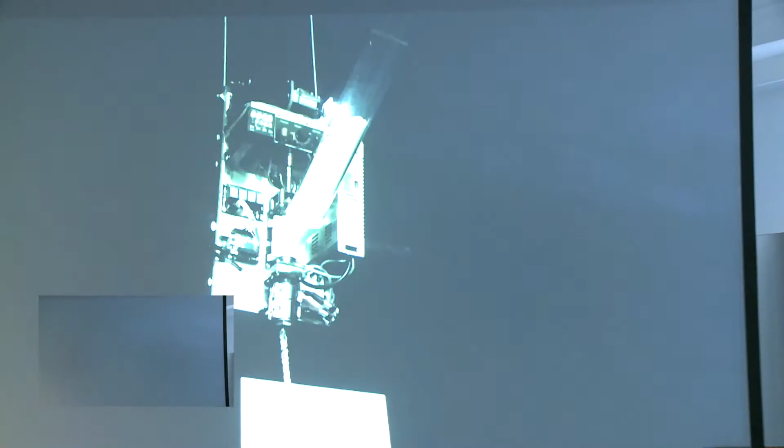Where's the sound? There's no sound playing. No, here, the cable is here. There is no sound. Why? Okay. So, there's a problem. It was working. Mattia. Yeah. But it's not reading. Okay. There you go. No, it's not. Just play it. No, don't play it. Look, it's not reading. Is it on the microphone? Yeah, it's done. It's because you need to play it. Can I? Just the audio. Yeah, just the audio. There's no audio. There's audio at our end, it's your end.

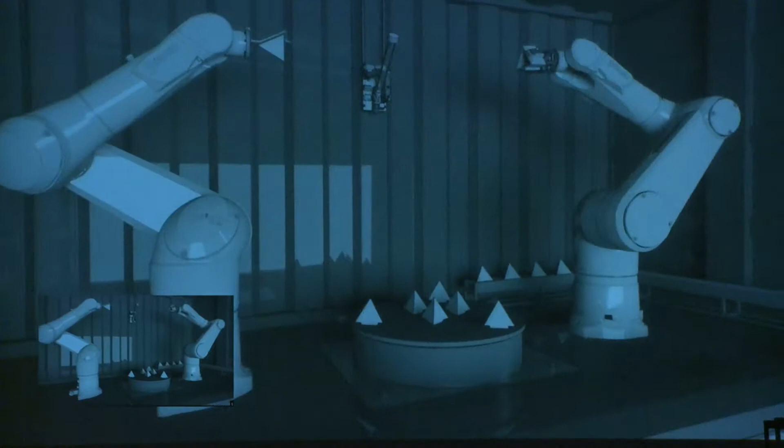Our thesis is on automated robotic fabrication for temporary architecture. At a minimum rate, there are 1,418 temporary pop-ups currently in London. All the waste from these temporary architectures, along with the permanent ones, contributes to 40% of the overall waste in London, making them the highest from the overall total waste. 70% of this waste ends up in landfill, while only 11% gets recycled. The London municipality is aiming to reduce the 70% to 20% and to increase recyclability from 11% to 25%.

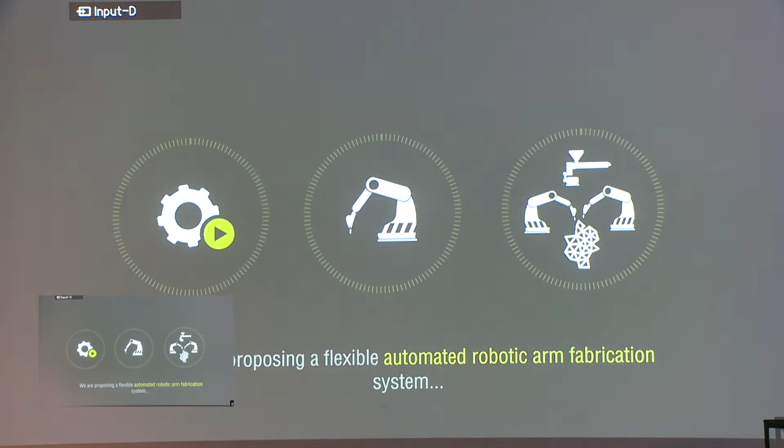Therefore, we're proposing a flexible automated robotic arm fabrication system, which exploits phase-changing material and utilizes robotic arms' intelligence by executing accurate, repetitive actions. The system, enclosed in a mobile cell, allows the fabrication of a continuous lattice structure that can be melted and reused again or just be left to biodegrade. The dynamism and reusability of our system result in various temporary architecture applications, where the manufactured lattice is manually assembled on site using heat only.

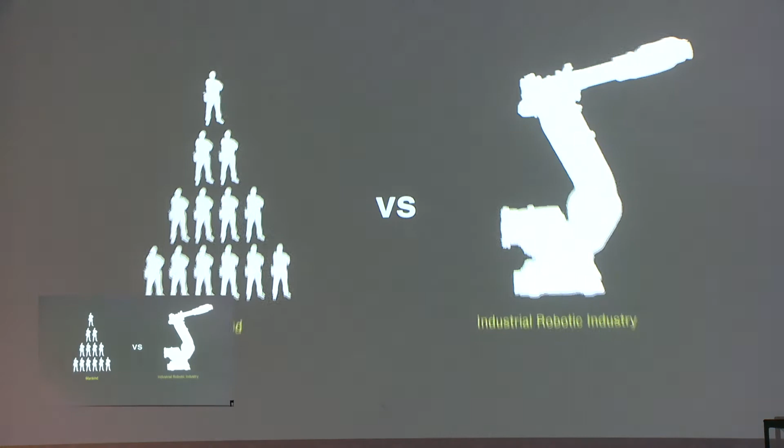Over the centuries, industrial robotic arms have been trying to replace human force in factories by only doing things faster, stronger, and more accurate, but never replace intelligence. Since the use of industrial robotic arms in the factory, until this day, they've only been doing things more accurately, faster and better, but not yet integrating the intelligence of the material at hand. Thus, architects look at robotic arms and understand their different parameters to use them differently.

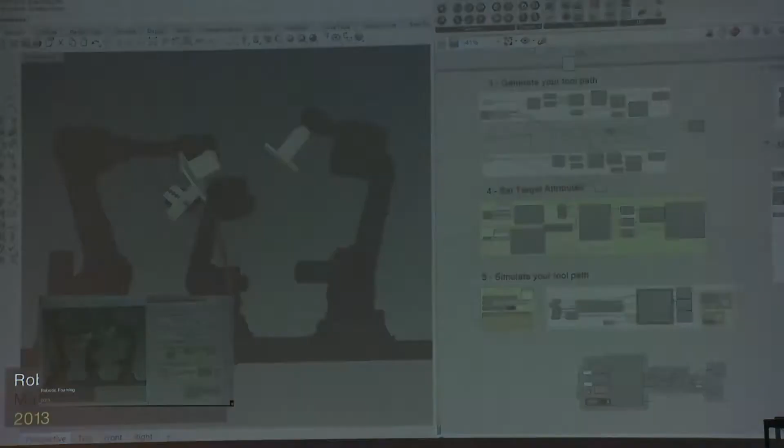Architects such as Gramazio and Kohler try to understand the parameters of this tool, and rather than use it as a fabrication tool, try to integrate it in a bigger picture where the material is thought of as intelligent. Thus, we're aiming to shift this paradigm of the industrial robot being just a force replacement in factories and try to integrate it in a bigger picture with the material. So why are we using robotic arms? For their accuracy, simple repetitive actions and customization of their end effector, to integrate them with the material intelligence and to facilitate a novel kind of architecture.

As a phase-changing material, we focused on plastics. Plastic has had its use in architecture since the 1950s, when architects were trying to produce a continuous free-form shape. Yet, they were only able to achieve it in panels. Even until this day, panelization of plastic came a long way, where they tried to triangulate to produce free-form shapes or cast all the plastic at once. But none of these projects really look at the phase-changing materiality of plastics and what can be done with it, such as this project where the material is actually pulled. So we're aiming to use phase-changing plastic with its material intelligence to create a continuous structure.

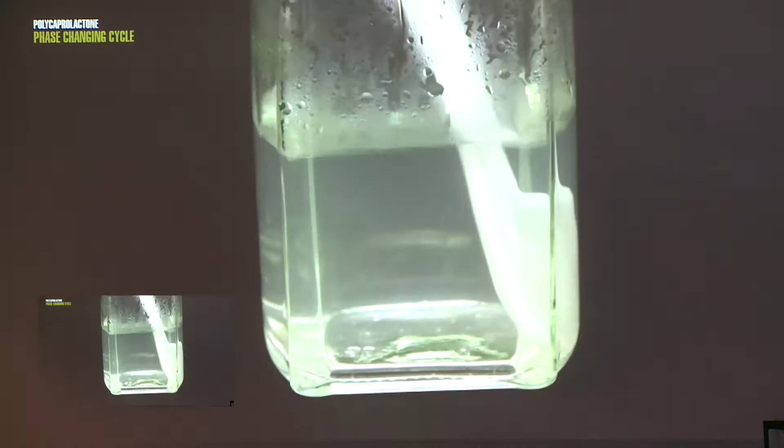We are using polycaprolactone. Polycaprolactone is a biodegradable polyester whose melting point is 60 degrees. The most important characteristics of this material are that it's biodegradable, reusable, has high abrasion resistance, and high elasticity. How does this material change phase? Initially, it comes in white granules that become a viscous mass by heating at 60 degrees. This material can be cooled down to get the solidified state, and can be melted again to reuse the material just by heating at 60 degrees. So the loop can repeat over and over again.

So having that in mind, we start to program our polycaprolactone. So the first experiments that we did, we used the solid granules, heating it by 60 degrees, getting the hot viscous mass. This viscous mass was deposited in 2 acrylic rigid plates, that then when pushed inwards and then pulled outwards, reaching a position or reaching a length, cooling it down to get a pulled beam.

So the first experiment, we did small-scale experiments trying to fuse the material with other materials and trying to look at the parameters of temperature and quantity, and then trying to scale up the most successful experiments and looking again at the parameters of temperature versus quantity. The physical experiment showed us that many parameters are involved in the material formation. For this reason, we developed a material simulation that allows us to study these parameters individually.

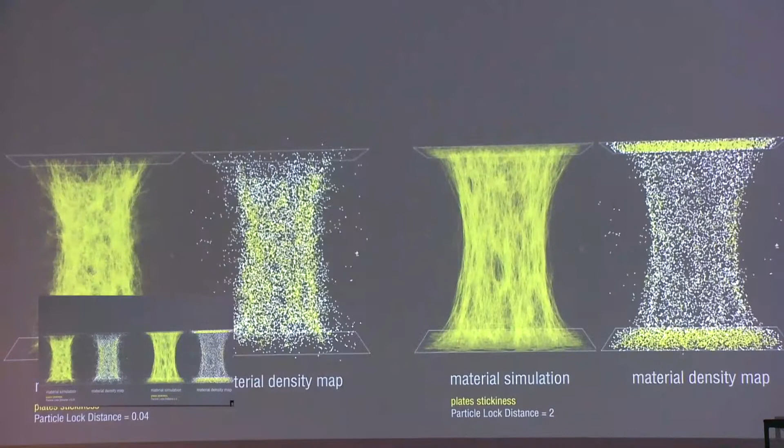First parameter that we studied is the particle thickness. So the number of neighbors that are connecting each other are able to control and determine the section. Another important parameter is the plates stickiness. According to how much material sticks on the plate, we can have a big section or a small section. So we understood by this that the plates can change the structural behavior of our beams.

Another important parameter is the initial material distribution that controls the amount of holes that we generate in the beams. We can see on the right side the formation of holes, while the left side is uniform and doesn't have holes. Last parameter that we studied is the viscosity of the material. More dense parts have more weight and they collapse on themselves. This doesn't allow the section to form properly.

After looking at all of those material simulation parameters, we were evaluating which is the correct deposition and the correct shape of the plate that we need to use. So we came to the conclusion that the triangular deposition and triangular plate is the optimal, because the surface tension is divided equally in 3 parts to get a stronger section.

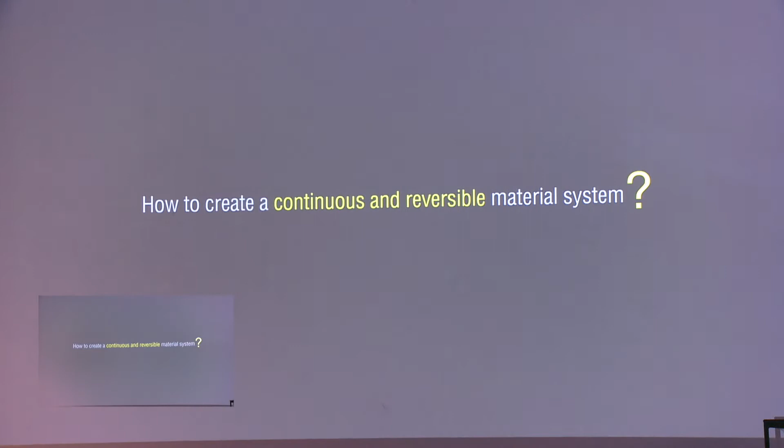So we started those experiments with triangular plates, acrylic plates, still trying to deposit in lines and in solid mass, getting a better result with solid mass. And also trying to get material continuity, we tried to explode or kind of pull a tetrahedron node, which we couldn't control really well. And also we had the issue of the rigid acrylic plates, so we couldn't get the continuity so well. So how to create a continuous and reversible material system? We came up with prefabricated nodes.

So the first prefabricated node is a tetrahedron node that is made of polycaprolactone, is lightweight, it's a regular tetrahedron, and a polycaprolactone regular triangular plate, which has 5 millimeters thickness. And we are pulling beams from those nodes. The minimum extrusion length is 10 centimeters, and the maximum extrusion length is 60 centimeters.

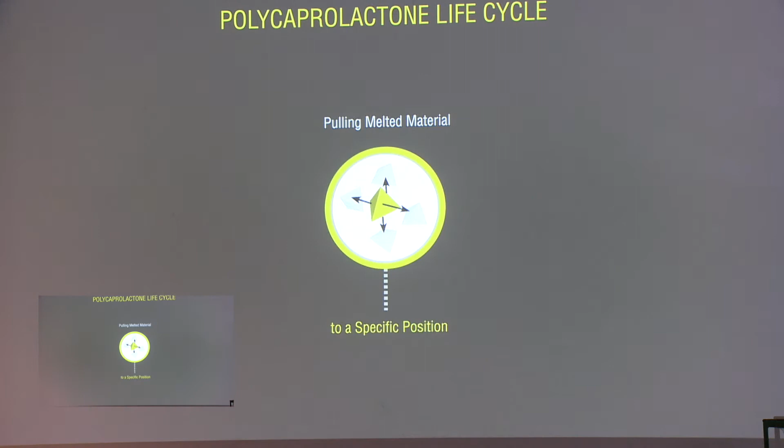So summarizing, how is our technique? We are taking the solid granules, heating them at 60 degrees, melting them until getting the viscous mass, depositing the material on rigid plates or tetrahedrons, pushing the melted material inwards, the nodes, pulling the melted material to reach a position, cooling the material down to reach the beam, and the loop can be repeated to create the lattice. So it gives us a cycle which leads to reusability.

To demonstrate that the system can behave well, we did 2 kinds of pulling: from plates to the tetrahedron node, and from tetrahedron to other tetrahedrons. Also, when all of the tetrahedrons are static, not doing anything.

Don't touch this. So when all of the, I didn't do anything.

Are static, we are closing the loop with the rigid plates. That's the use of the rigid plate.

So we are, move this a bit. It's okay. Just don't touch it.

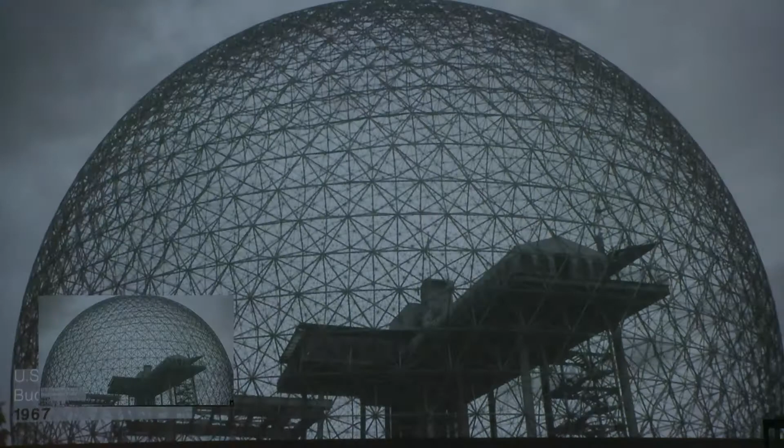We also looked at lattice relaxation, and the reason we did that is because we want a continuous lattice structure that can behave structurally, not dependent on the element itself, but rather as the whole network.

So in order to create a lattice structure, we were evaluating with the small scale models different kind of branching inside the system and evaluating which are the constraints of our material physically to get the lattice structure.

So those constraints are angle tolerances, extrusion length, tetrahedron position, and taking in consideration as well the robotic arm's constraints. So evaluating this, we know that the pulling of each beam has angle tolerances. So in each axis, X, Y, and Z, we have 45 degrees of tolerance to pull the beam.

Also, we consider which are the best orientations in space of the tetrahedron. So the first position is the best position for anchor point to the ground. The second position gives us opportunity for growing for upper structures. The third position gives us the possibility to join sides and connect ground with upper structures. And the fourth is a double tetrahedra that can give us more available faces to connect up and down.

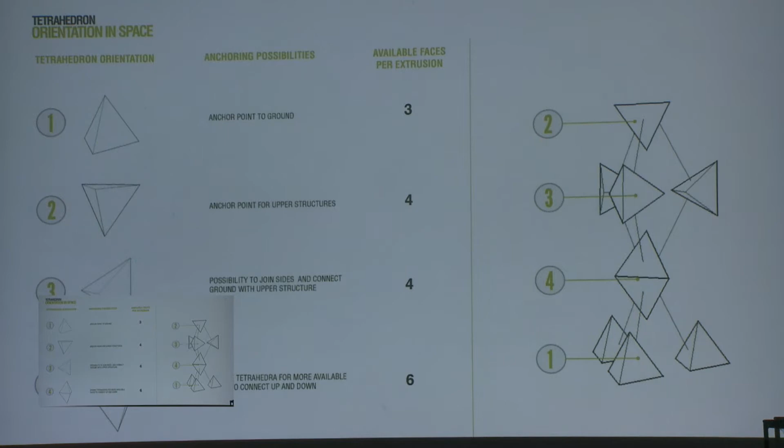So after this evaluation, we start with our spatial primitives. So starting with the minimum column, we develop a core that should be tied twice in order to get a triangulated column. In this case, the length of each beam varies depending on the force that they need to support. We develop a catalog of our spatial primitives. The minimal diameter is 0.90 meters, and the maximum is 1.20 meters.

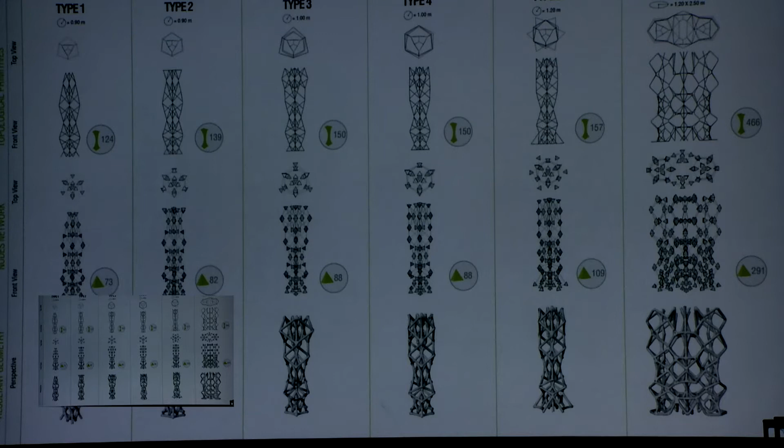We studied how with our system it is possible to generate a wall. The initial distribution of the anchor points controls the way the wall can grow. And the second layer determines the kind of pattern that we can achieve. We studied three different types of wall. First, we tried to have a minimal wall of 30 centimeters. Second is a wall of 50 centimeters. And third is a wall with 90 centimeters of thickness. We studied, moreover, how we can connect these walls together.

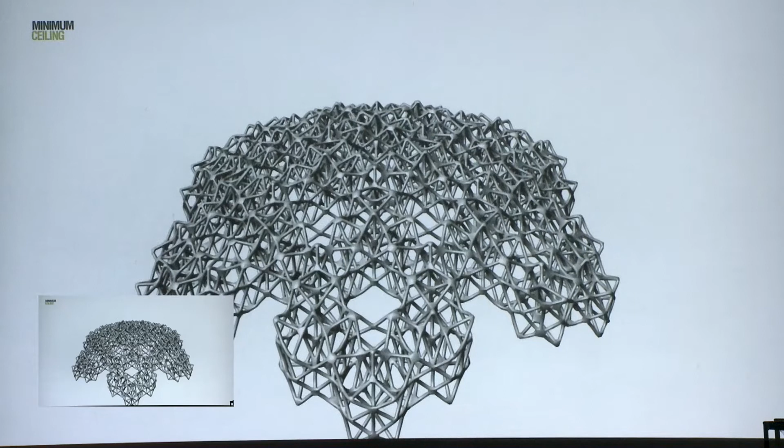As well, we studied ceilings and domes and shells. First, we started to generate a flat ceiling, but we realized that our structure doesn't really work flat. So we used a mesh, we relaxed it, so the triangulation of those elements is in between the range of our beams, and then we developed units on top of that relaxed mesh. We developed 2 units. Those units are only triangulated by themselves. They cannot allow available faces for the next one.

But then we moved forward and we developed another kind of units that have available faces to grow the structure. The first one allows the structure to grow linearly without any holes in the generated structure, while the second one allows the structure to grow radially, generating holes in between the structure. This is the catalog that we produced of the different single, double curvature, and shell primitives. And as you can see, different units generate different kinds of structures.

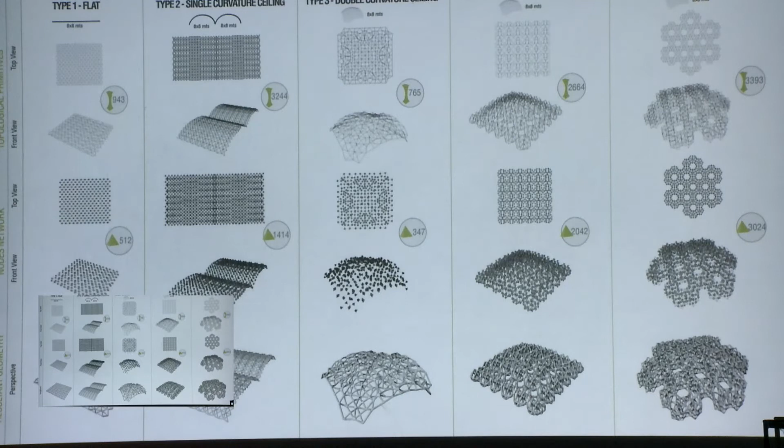Then we were evaluating the connection between columns and ceilings or walls and ceilings. So for this, it's really important to look how many available faces for connections are in the ceiling and in the column. For that reason, we develop a generic funnel that can be attached to both structures and can be adaptable for different kinds of ceilings and different kinds of columns. So this is a kind of catalog in which it's perceivable that it can be adaptable to different kinds of configurations.

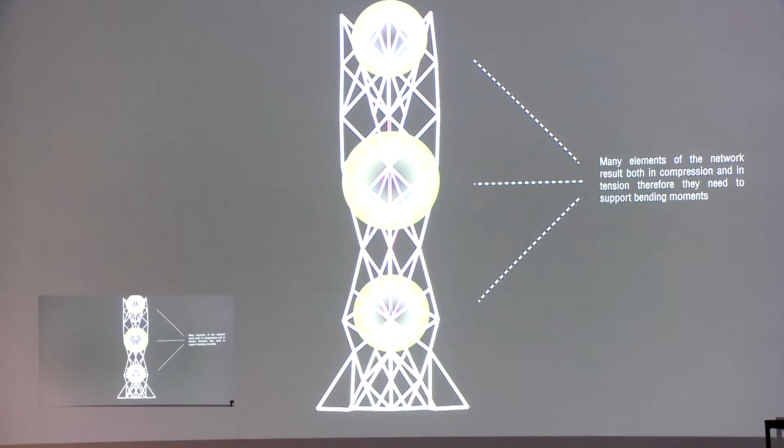These spatial primitives are evaluated from a structural point of view for the requirements given by our material. Thanks to the structural analysis, we understood that some of the elements in our lattice are both in tension and in compression. But what we observe is that the material that we have actually generates beams that are thin in the center, so they are unstable and they work better in pure axial forces, tension or compression.

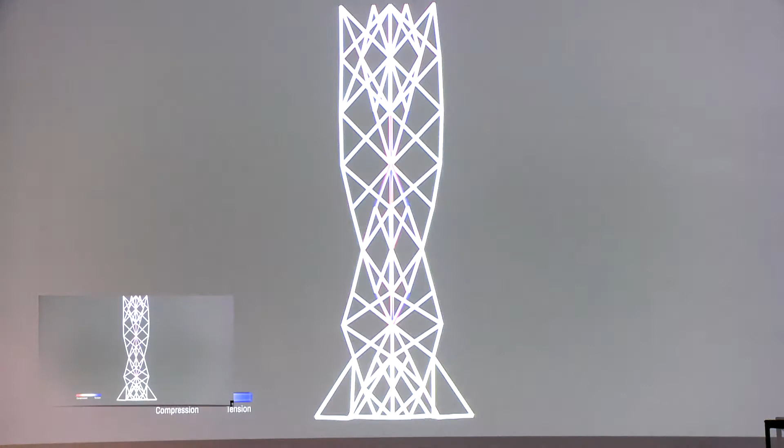So we studied how we can achieve a pure axial network using a particle spring system. But we need to consider also the parameters of our material, the constraints of our material: angles, extrusion length, tetrahedron position, and robotic fabrication. In order to do this, we developed a strategy where we are controlling the relaxation of the system, allowing only those points that have more tension to move. So we are trying to reduce the singularities in the flow of the tension.

We are studying also how, when we are going to fabricate the system, the equilibrium of each element works. So we separated it in chunks of fabrication, and we are considering anchor points and load points, and we are analyzing the displacement of these elements in order to understand where the anchor point will be when we are going to overlap many layers of construction.

So we get from here two important pieces of information: the distribution of the beams that are going to have more deformation, and the distribution of anchor points by overlapping different layers. We compared the different networks and the behavior of different networks. In the case of the column, the strategy was to try to find a network that needs less deformation to reduce the

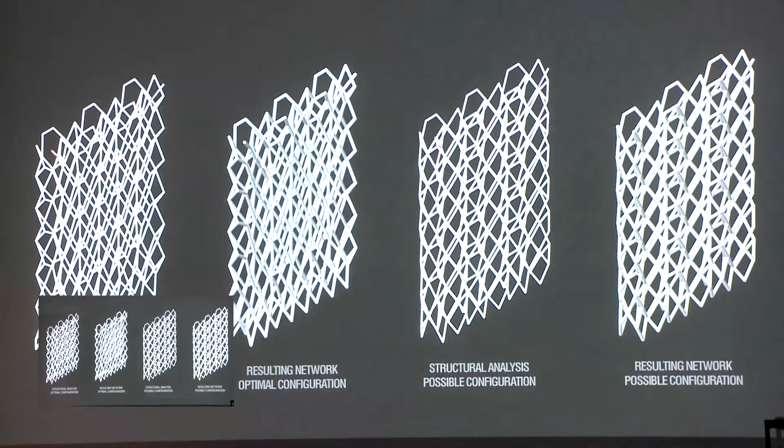bending forces. We did the same studies also for the walls, and we observed that in the walls the tension configuration is closer to the starting configuration. Similar studies have been done for the ceilings, and what we observed here is that the ceilings tend to generate in the bottom part concave shapes in order to support the loads. Similar behaviors to the column have been observed also in the funnel.

In parallel with the material experiments and the primitives, we started to study the robotic movements, constraints, possibilities, and limitations that we have. We started to see how robotic arms are used in the industry. They are using them according to the usage of the end effector. The end effector, its customization and possibilities, gives the robotic arm the opportunity to do different actions. So for us, the end effector is a mediator between the material intelligence and the robotic action.

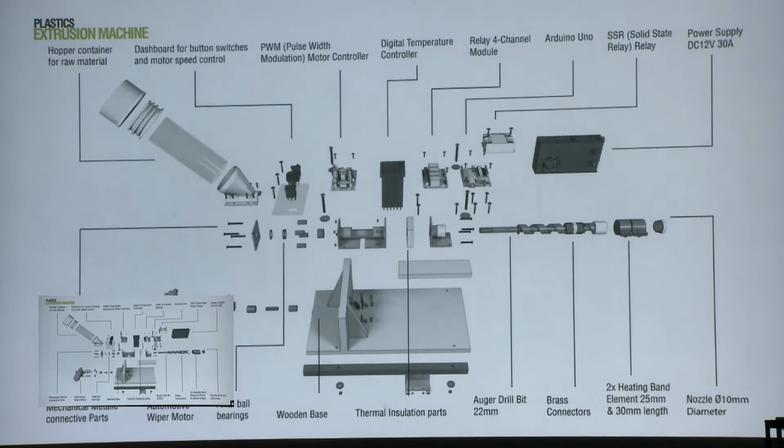As long as we have a depositing system, a deposition machine, it needs to be developed. This is an extrusion machine that takes the material as granules and extrudes it at 60 degrees as a viscous mass. It's run by a temperature controller, and we use an Arduino and a DC motor to control the deposition and the speed of the deposition in order to have an automated fabrication system.

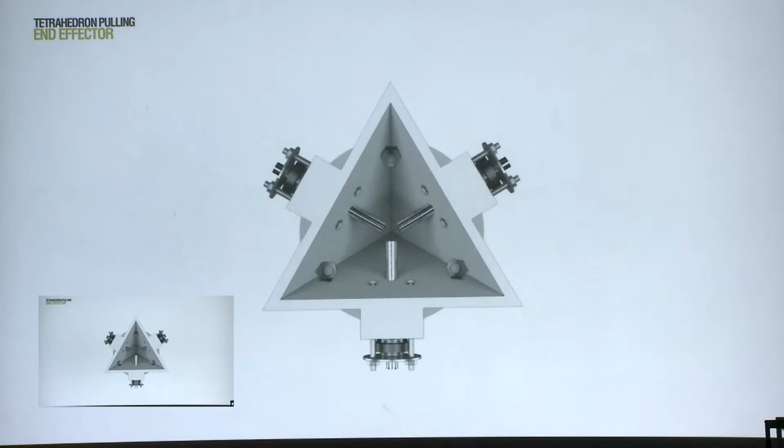The next end effector that was necessary was an end effector that can take the tetrahedron, place it and release it in place. So it's an effector that can lock and unlock the tetrahedra and place it in position. Another necessary effector is the plate end effector, the one that needs to connect two faces in between. It's a simple mechanical end effector that can change the plate easily and in a fast way.

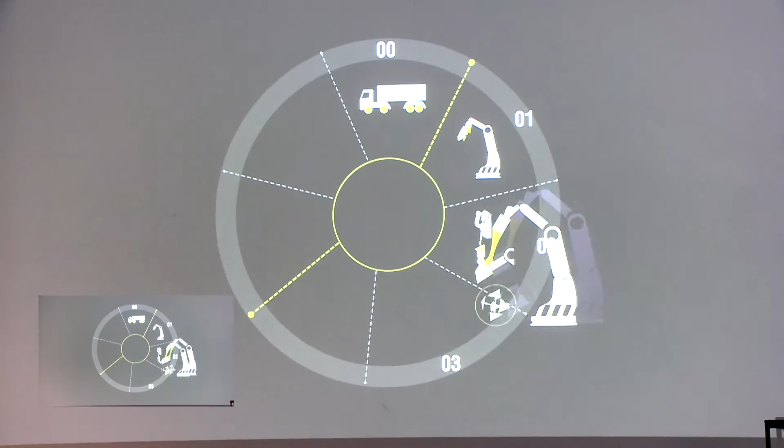So, how does our fabrication process work? The whole process is enclosed in a cell. The cell is mobile, with the minimum amount of robots needed for the fabrication to start. The fabrication starts by picking a node, then the robot takes the node to the extruder, goes to the anchor point, pulls the beam and then freezes the beam with cold air. Once the units are fabricated, they are assembled on site by human workers using heat only.

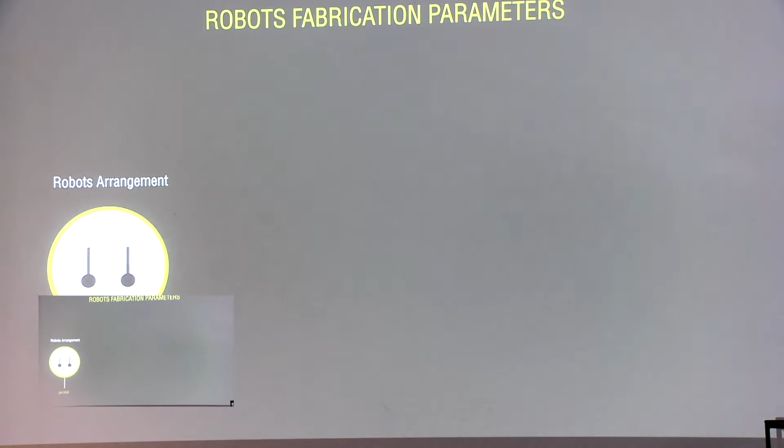Once that architecture is done, it can either be shredded down and refed into the system or just left to biodegrade and produce biomass. To demonstrate this cycle, we did a prototype with an already arranged configuration of robots that we had to study and fit into our system. These are the main parameters that played a big role in the fabrication process, as well as real-time parameters such as extrusion speed and deposition speed.

A geometry was fabricated specifically for this arrangement of robots. As I said before, the arrangement affects the geometry and so on. A rotation table was needed, so the pulling point is only in one point for both robots, and the extruder is placed in between the two robots to facilitate a faster process.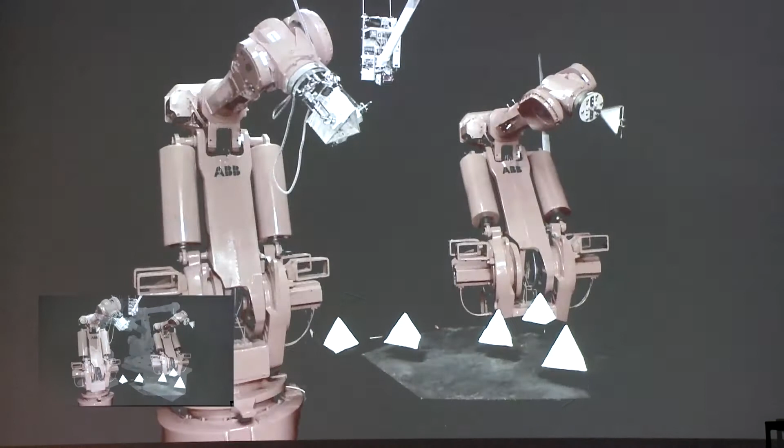So the process starts with a predefined position where the choreography can take place to all the points in space desired for the pulling. The tetrahedron position is also predefined. We have two end effectors: the pulling end effector, which also picks up the tetrahedron, and the plate end effector, which only connects an existing beam pulled in space. The extruder is static in between the two robots, and the process starts by picking up the tetrahedron.

Then the robot goes to the extruder to extrude the material on the face of the picked tetrahedron. The control of the temperature of the extruded material is really important because it affects the structure of the beam that is being pulled by the robot.

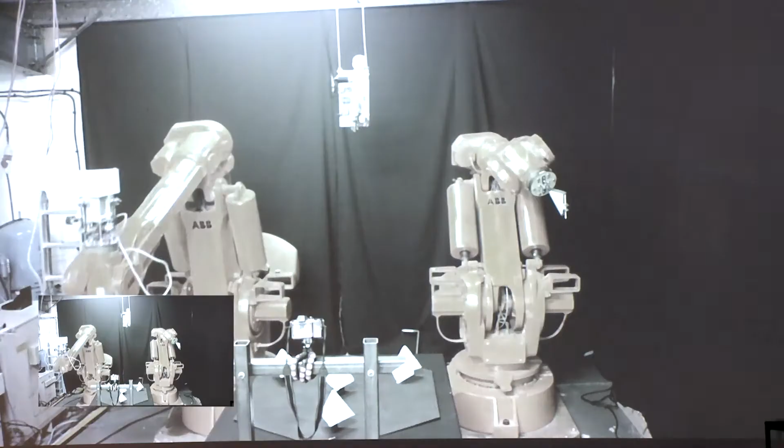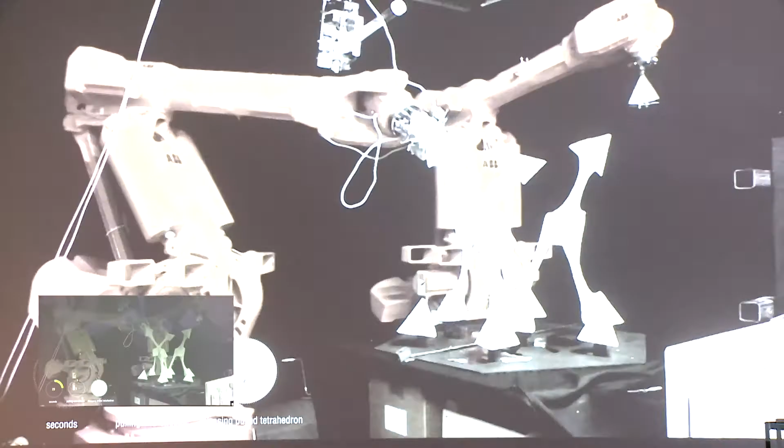Once the extrusion process is done, the robot goes to the predefined anchor point and starts pulling the iterations. The speed and the angle at which the robot pulls the material are really important, and this is where the accuracy of robotic arms comes in handy. Freezing is manual at this point, but we integrate it automatically later in the system. The plate end effector is used to connect two existing nodes in space.

And then we freeze the material instantly. Within seconds, it sets solid. Now, to join the two existing solid plates, we just use heat on one surface of the existing pulled beam to join the two nodes manually.

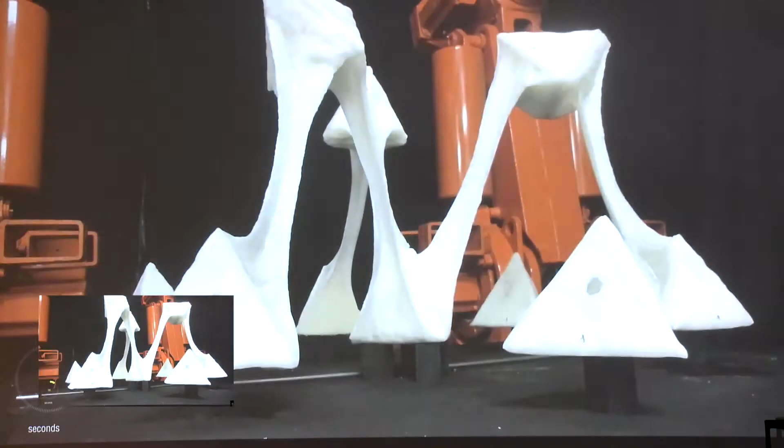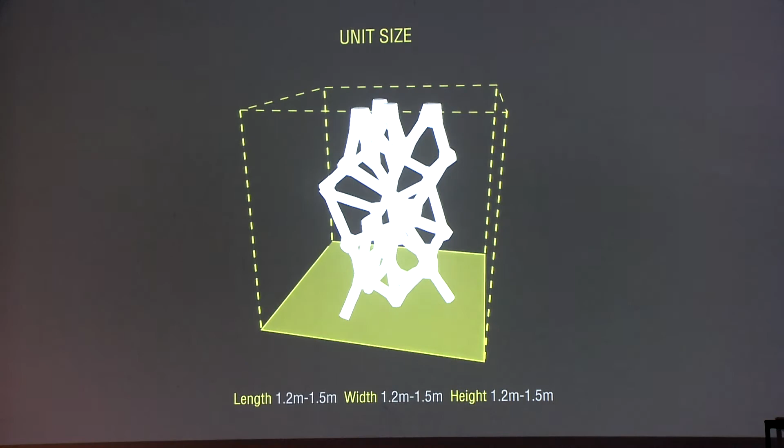We continue studying the robotic configuration, which is the optimal configuration of the robot regarding the parameters. And we have units. The unit size is very important. Our unit size is usually 1.2 to 1.5 meters. So we consider this as a working space. As long as we are using symmetry as well, it's important for us.

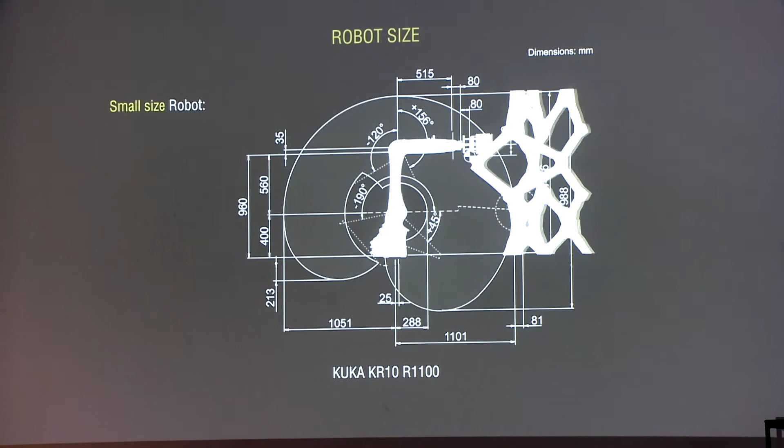We are using a rotation table, so the robot doesn't have to move in space, rather the model is moving around, so it can reach a certain position more easily and achieve the movement needed. With the robot size, it's important to define the distance between the working area and the robot, and we started to figure out, with the different models and sizes of the robot, which one is needed for our fabrication. The small-size model seems to be the best one in order to achieve our movement.

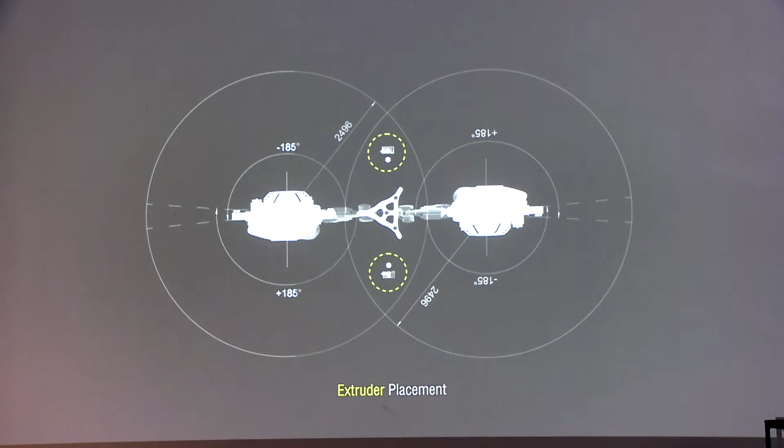And as long as we have the two robots, the extruder placement needs to be equally divided in space, so the robot can reach it. We divide the space equally for the two robots as well. Saying that, the cell that we are trying to achieve seems to be 6 by 4 by 3 meters, and it's the optimal configuration that we need to do our units and to fabricate.

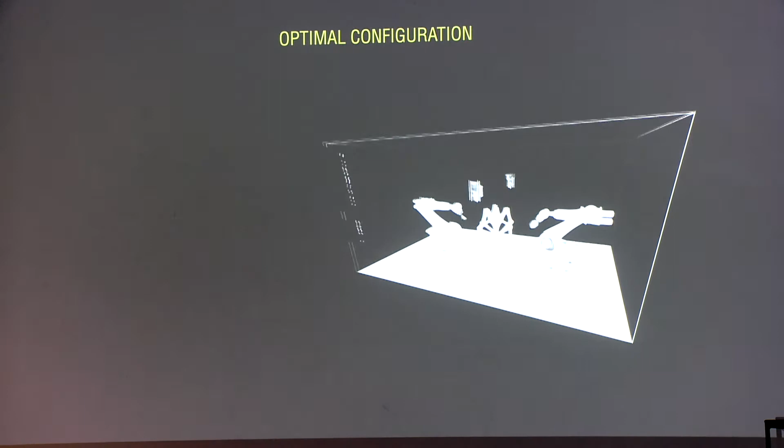So, we're aiming to shift this paradigm where industrial robots are used in factories to produce building blocks, and those building blocks are moved to site, and then on site they're assembled by humans. Rather, we want to fade away this line in between and bring it all into one, where the material, the process of fabrication and the outcome are all in one. And a precedent is Gramazio Kohler, where the robot is actually building the architecture on site, and it's the factory as well.

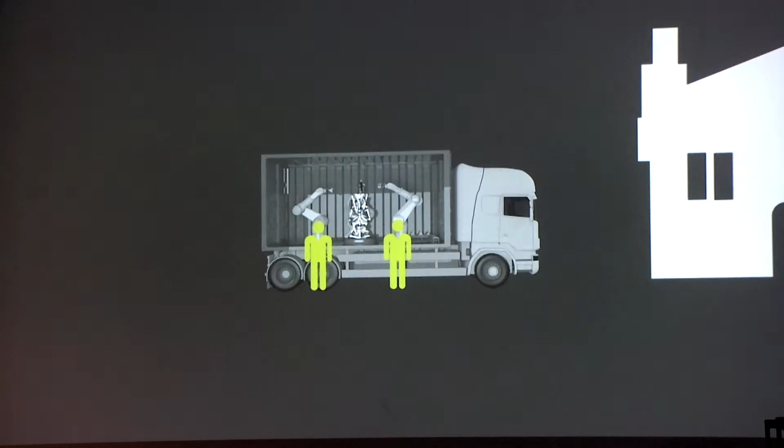Therefore, knowing our optimal configuration that can fit into a standard truck and can be moved to site, once the truck arrives on site, the fabrication starts. And once the fabrication of the unit ends, manual workers assemble those units on site using heat only. The fabrication process is aimed to be as simple as possible.

So in summary, our system can produce structures that are jointless and self-bindable with minimum scaffolding and no formwork needed. All the manufacturing process is done in a mobile cell, and once the units are no longer in use, they can either be shredded down, refit into the system, or left to biodegrade. The biodegradability of the material can vary according to usage, from 45 days to 4 years. Approximately, it takes 2 hours to produce 1 cubic meter of space with our material.

So what can we do with this automated robotic fabrication system? Due to the material's phase-changing property, it can produce different kinds of nodes, different angles and different directions. Along with the precision of the robot and the intelligence of the material, we're producing lattice structures that can be assembled on site using heat only, for different kinds of activities: restaurants, galleries, spaces, pavilions, and so on. So as a prototypical approach, we chose a restaurant and a performance space to demonstrate our system.

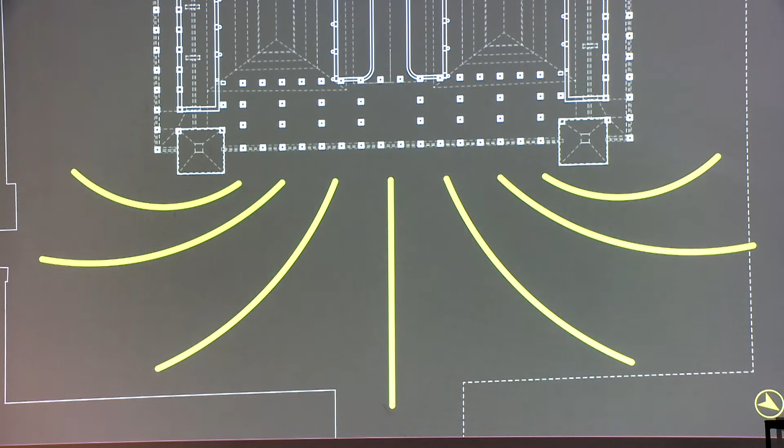We generated a prototypical application of our system on the restaurant in the Covent Garden Market in front of Russell Street. In order to generate a relation with the Opera House building, we extended the design area from the terrace to the square. We took into consideration the main circulation that happens in the square, and we focused our attention on the circulation that affects our design area.

According to this circulation, we defined anchor points that we use to define the boundary and the opening edge of our geometry. We introduce closed boundaries that generate new anchor points, and we generated a circular pattern that gives us control over the length and the distribution of density of nodes, generating the 2D initial pattern.

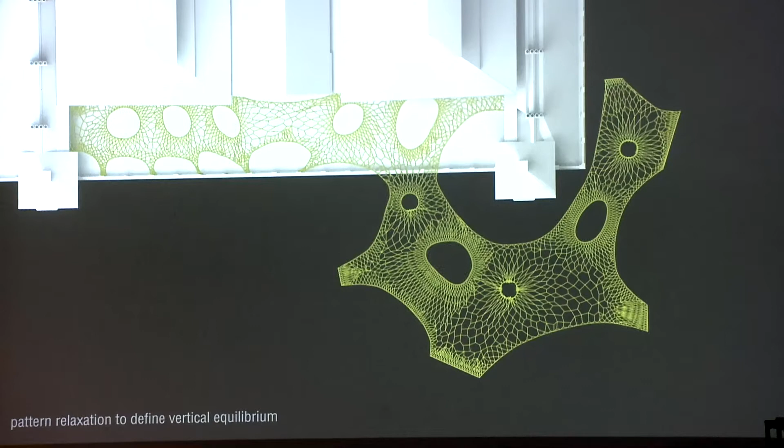Then we relaxed this structure in order to respect the material behavior, which needs to work mainly in axial forces. As we can see, we are achieving a network that is mainly working in compression and in tension. Tension happens mainly in the closed boundaries. We are controlling the parameters of this relaxation, taking into consideration the maximum length that the material can achieve. So we relax the system in order to keep the maximum length at 60 centimeters.

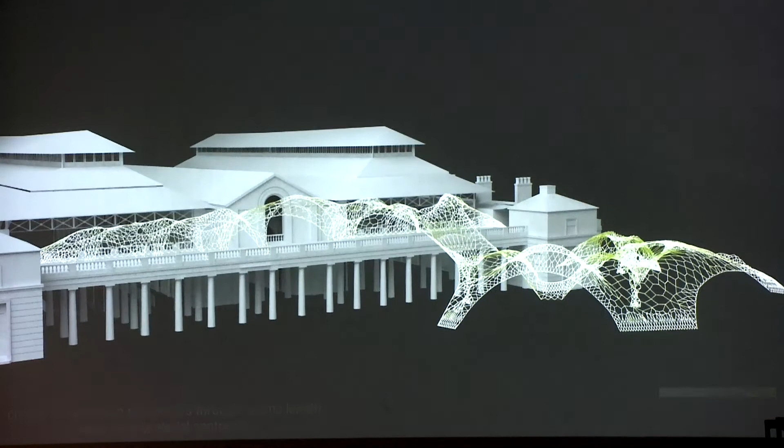At the end of this process, we are evaluating and controlling the angle distribution. That is another important material parameter for our system. And we can observe from the map and from the diagrams that the distribution is changing according to a 5% value. So it is perfectly feasible with our material parameters.

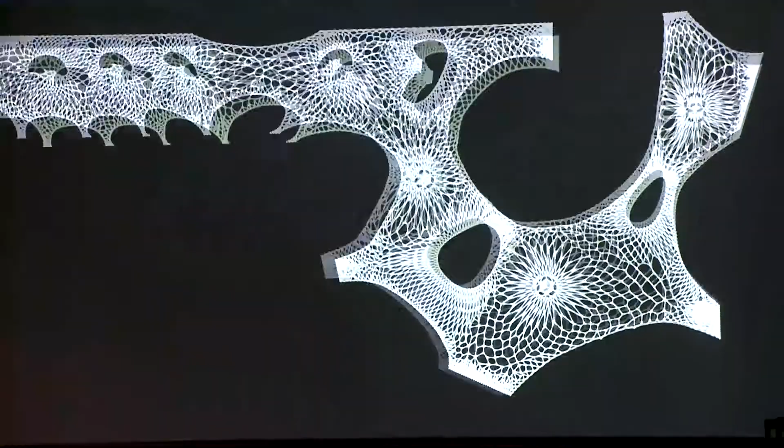In order to fabricate our system, we subdivide the geometry into fabrication units that will be assembled by hand. The assembly process starts from the anchor points and grows radially in order to complete the wall structure using temporary scaffolding points. So in summary, the mobile cell moves to different kinds of sites. And in our case, it's moving towards Covent Garden. Once the cell arrives, the fabrication process starts.

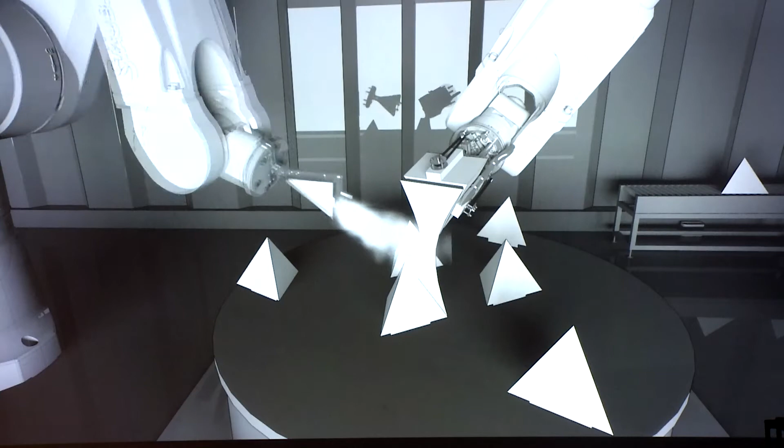Then the fabricated units are assembled manually on site. The units are assembled as on the pattern. And then the structure is achieved. It's used heat only, so it's a monomaterial, completely integrated.

And this is a prototypical scenario of the application. Once it's done, it either biodegrades and produces biomass, or it's refed into the system and moves to another site.

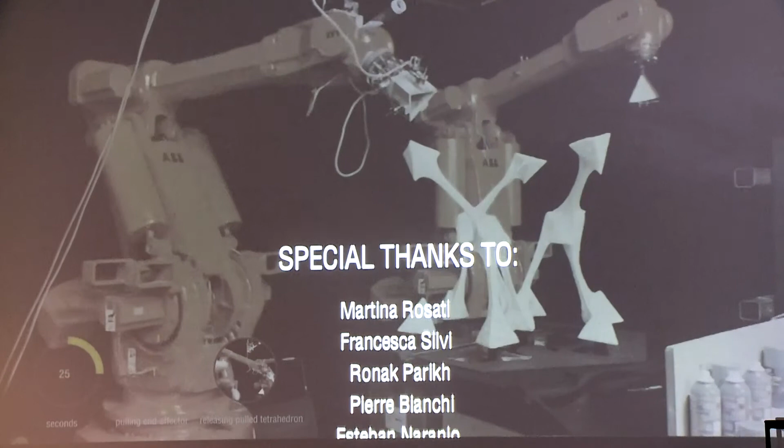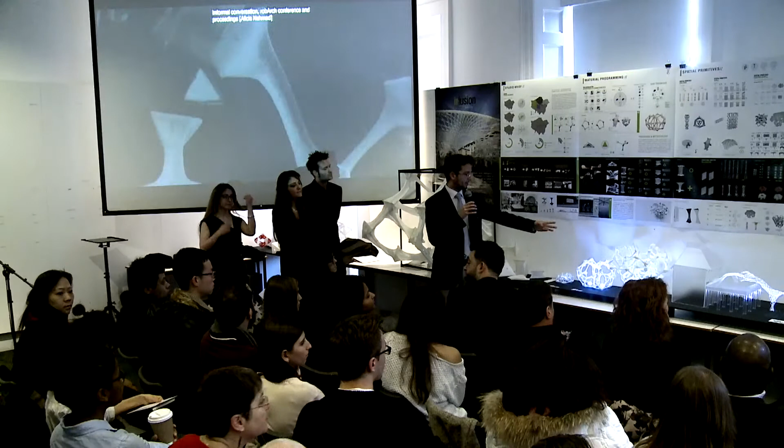This is one of our initial experiments while we were using the rigid plates, and we still didn't achieve the continuity of the material. Then these are some spatial primitives and explorations that we did to achieve the angles. Then the material experimentation helped to continue with the digital.

This is a design proposal that we see as a prototypical example of our system. These are some of the spatial primitives, and these are our end effectors that we were using for the fabrication.

Here we demonstrate what is the minimum and the maximum length of the beams with our material, and this is the fabrication that we did in RoboFold with Greg, that we have here. It's a 1:1 scale model, and it uses robots completely to fabricate.

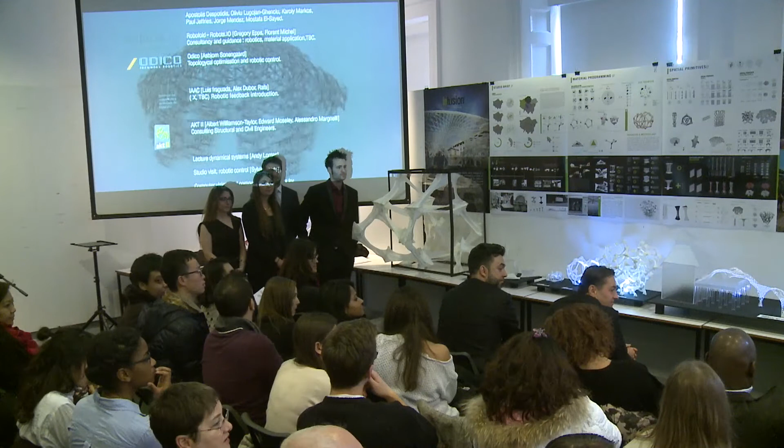Very fascinating, and a lot of work put into this, and also great that you achieved to realize something, a real prototype. I'll maybe directly dive into some questions that hint at the structural constraints that you might have. You made a comment that you optimize it to reduce the tension in the elements, but the shape of the profile is actually best in tension, not in compression.

And that is a very non-typical thing. So imagine optimizing a column where you try to have as many tension elements as possible, because your profile suggests that. So that might be interesting to explore.

Also, when you look at the prototype that you did at RoboFold, you see that gravity plays a big role during your extrusion. So perhaps it's more relevant to optimize your discretization, or how you cut up the pieces that you will assemble on site, having them as much aligned with gravity in the workshop, so that you can control your geometry, right?

Or otherwise, you were talking about material intelligence. Well, that is perhaps a part of the material that is kind of dumb for what you're trying to do with it. So then you would need to take that into your simulation as well.

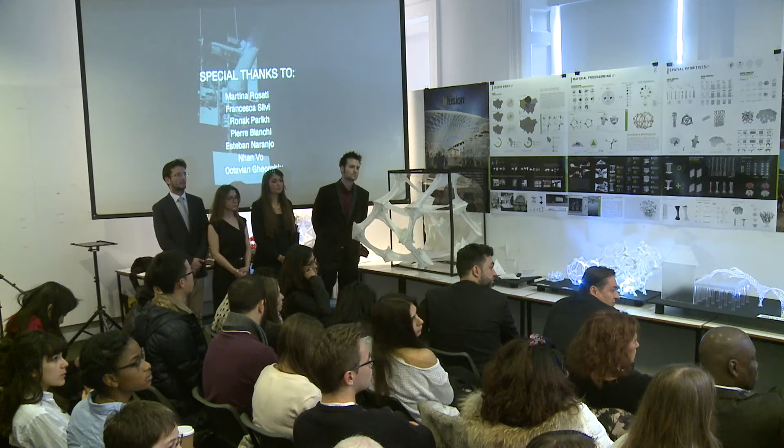I think it's pretty amazing that you have these prototypes here. First of all, it's pretty incredible to see. There's a sort of narrative in the project that's related to in situ fabrication. You spend a lot of time talking about this kind of cell that shows up on a site with these two robots in it. And for me, that's less compelling right now.

It almost seems like it's not really necessary, per se. I mean, this could easily just be built in a studio and brought to a site. And as you've mentioned, there might be efficiencies to that.

And I can't help but wonder, maybe it's because I've been staring at this clicking machine, which seems like there's been some real innovation here in the end effector. I can't help but wonder if there was another project here that would question the industrial robot arm much more fundamentally.

At least for me right now, I know that these are doing complex things, but really when I get into it, I can actually replicate much of this motion just with my arms, and maybe some very simple motors that are angling, and it just seems like the innovation here could also begin to take on a kind of machine design, a kind of creative machine that could in fact be in situ, that might create a component and then slide along that component, create the next component, and would begin to quite literally fabricate this in situ.

And again, I'm fantasizing about a kind of machine that doesn't exist in the world. But I wonder if really to produce the kind of project with the narrative that you're after, it really is going to take much more machine innovation at a more fundamental level to really question the technology much more fundamentally.

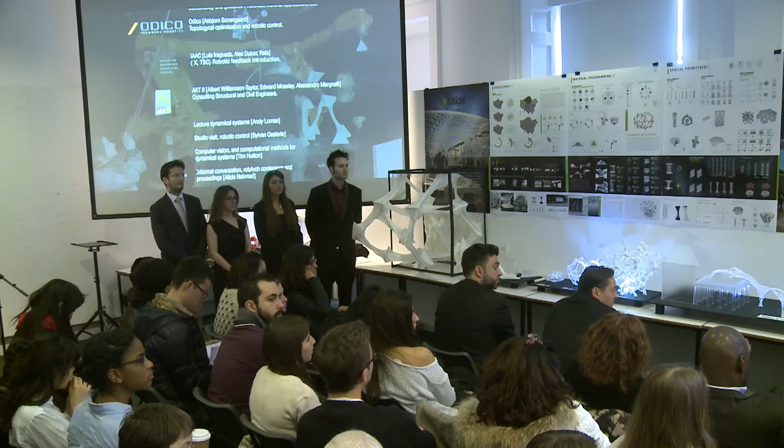That being said, you've done a lot with the industrial robot arm, but I think in the presentation, it kind of kept going, and at a certain point, I felt like it would have been productive to break and question that. It's clear that you've done some of that, but I couldn't help but think that would have been a potential avenue, let's just say.

Can I really quickly follow up on that? So these extrusions are much more controlled. They're linear. They go with gravity. That's the point I made earlier. But then what Jason is saying is, are you really doing much more by, for example, positioning with a robot very exactly where your node needs to be, and then fuse it directly on site?

And so think of not necessarily a module, and use a robot in a very different kind of situation. Anyway, and they could then also be the temporary scaffolding during the assembly. So perhaps.

Just a few points. The first point, I want to congratulate you, not only on the research, but on the amazing presentation format. The didactic, every single slide full of videos and sequencing of graphics. I've just been reflecting on the economic value of just this presentation. You don't want to know, really. I know what it takes. It's really, really stunning, and I think there is a general comment which I think is amazing in DRL this cycle, the professionalism and compelling presentation material, really striking.

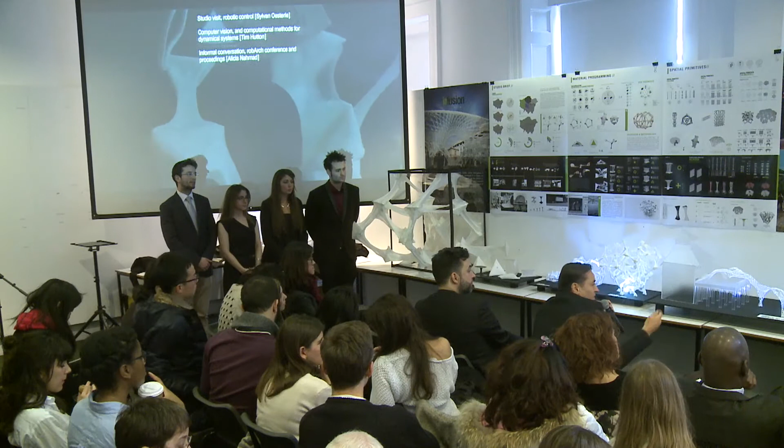Now, in terms of the content of the work, I think it's very intelligent and great, and I think there is merit in picking up the robot and running with it, because it's a ubiquitous piece of equipment which deserves to be exploited, and you're entering a research community that is trying to do that. Although I agree there could be other spin-off machine inventions, most probably less likely to pull off a real realization. The same with the quadrocopters. They're usually picked up on items which become available and are ubiquitous. I think it's very bright and intelligent.

Now, specifically on the project, a number of comments. First is, the more you create these primitives and the more symmetry and repetition they have, the less they require this particular mode of production, which is all about unique elements with unique variations of angle, length, maybe material, quantity, and so on. So I think the final project validates that. With some of these, you would then question that method and think of casting and more traditional mechanisms and ways of working.

If you take that approach seriously, there's a lot of lovely elements to it, the biodegradableness, only 60 degrees of melting. By the way, don't do this project in Qatar or South Africa, so there's climatic limits to that. But I've been thinking about the strengths of this and the profile and the structural capacity, which you started talking about, with its tensile and compressive strengths. By the way, it's great to maximize tension members, but somewhere compression has to go. So then you would have to introduce another element altogether, which picks up that concentrated compression in the system.

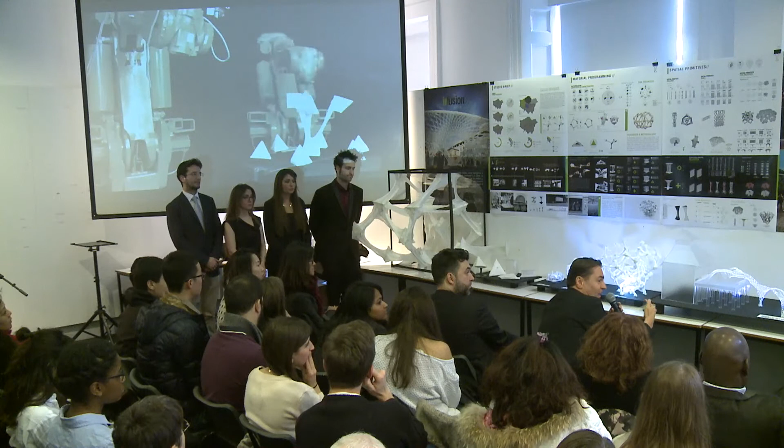But there's a lot of weakness in this. This has a moment connection, so it doesn't need triangulation. That's one element we know, but it becomes quite weak in compression and tension, and in torsion. It's incredibly weak. So what I would question here is that idea of a single pull, single operation. You already have robots doing other things. You have the cooling. By the way, you actually need a third robot to hold this, because as we saw, when the robot pulls off an existing lattice, which is at that point maybe soft, the whole thing distorts. It might become an interesting element in the process, but a third robot just locking that would be another point. But my point is really this.

The element doesn't need to be that pure. It doesn't need to be a single pull. I think for me, this element creates the webs of an I-beam, and if you now print flanges, or another kind of pulling of a flange element across that, then you get something very, very strong. And still, obviously, it's never an ideal optimized element, because you have these constraints which give you the flexibility in the machinery. So that's also worthwhile to be reflected on.

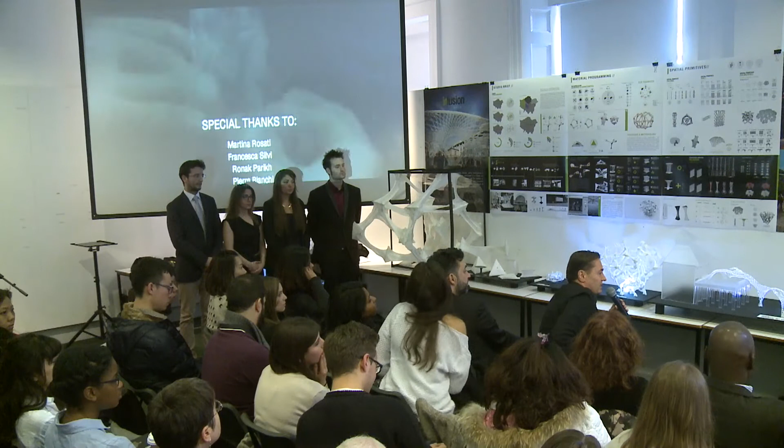If you had that lattice, what would be the optimized ideal or various ideal geometries which this element should have at that point, and what are your constraints, and how far do you approximate this? I think that as a statement of method would have been necessary, rather than just living with the relative dysfunctionality, or not measuring it against a more idealized geometry.

Sorry, can I just add to that? I think your presentation was brilliant. I really like the way you present, somebody's already said it, and I like your modeling. The thing is, you very quickly moved from understanding the material to what you can do with it, without really exploring a bit more what the material can do.

The fact that you can get a material which you can reduce from about 60 degrees, you can reform it. You can make it into a number of forms. And when you look at your model there, and even these models, it's clear that it's taking compression, as already mentioned. It can take bending. You only concentrated on tension. Now, every form of building will take tension, compression, bending, torsion, all of those. Your material, from what you've started with, can do that. And you haven't explored that.

Having said that, the way you've presented your work and the forms you've tried to create with it are quite complex forms. So within the complex forms you're trying to create, you're then limiting your material in terms of what it can do. So I do believe that moving forward, you need to step back a little bit and actually give a bit more information as to what this material can do. You want the material intelligence. Explore that material intelligence. Once you've explored that, your forms are no longer limited. You can then create a bit more with that form.

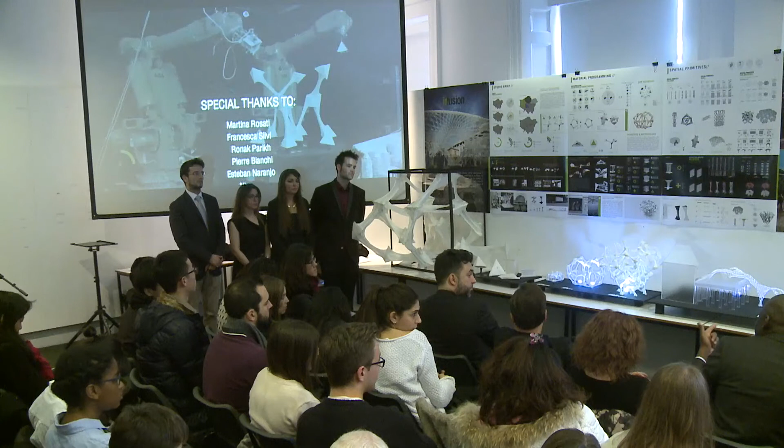Even when you look at this, is it going to be cladded or not? Nothing's saying your material cannot clad it in its form. And also what was mentioned: why not have something that's continuously fusing? You're using a robot, and the temperature you need to deform it is quite low, so there's nothing saying that even as it's continuously being built, it can be deformed and formed. See what I mean? So I think there's a whole section of the work on the materiality of what you're using, which you can explore a little bit more.

That'll be my contribution to this. I think it's a fantastic piece of work, and I actually like the fact that you're doing something with it. You're creating a form with it, and with that form, where you're limiting yourself, you can do a lot more.

I'm going to add a little bit to this. I don't know if I will be able to explain this in a proper structural way, definitely not. But yeah, exactly. Please do help me.

What strikes me in the project is the great quantity of symmetry that I see around. And I immediately wonder, why could these elements not be prefabricated if there is so much symmetry? Wouldn't it be 10 times more efficient? And so, back to the material qualities.

For some reason, somewhere along the project, to me, it became monothematic. As much as I liked the graphics, after the first 10 slides they became repetitive. The idea of the biodegradable, reusable is repeated 50 times during the presentation. The elements are repeated 200 times in each model.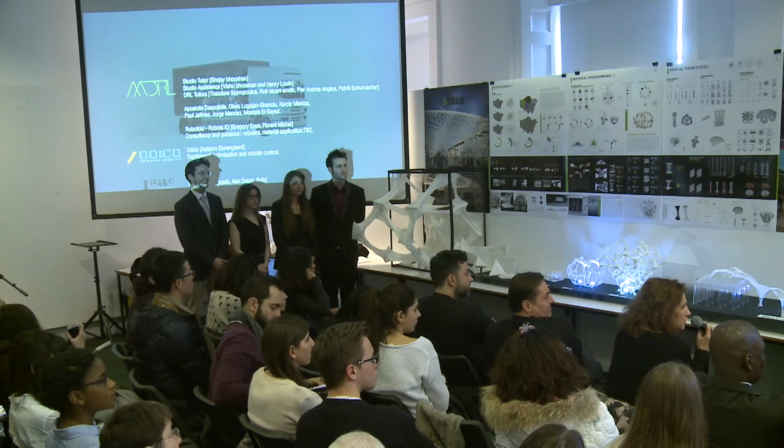And I don't know, there is something that fundamentally doesn't work. And it has to do with this repetition and the willingness to still advocate for a non-standard mode of production that will be done on site. For me, there is a major contradiction in the project and the way it is presented. The way it is worked out and the way it is presented.

So, having said that, I think that you have to reflect on this, because I think you still have in the project all the elements to make it more coherent, but you need to stress exactly the non-standard, exactly what it means to fabricate on site. What exactly is this? And at the moment, I don't see it anywhere. Let's say I don't see it, at least the way it's been presented today.

There was at the very beginning, when you were advocating for the plastic architecture, this one slide in which you were pulling a line as opposed to one single vector. Let's say you were pulling a surface of plastic. There was this beautiful slide of 3 layers of line being pulled into a kind of surface made out of ridges, that I thought, well, there is something there that has to do with material quality, with a new form of making, and eventually exploring the potential of the material qualities in terms of the holes.

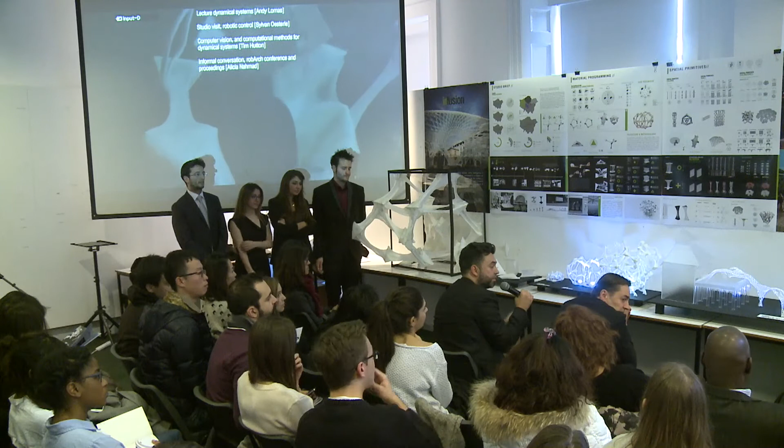And I think part of the decisions, when it started off in more free-form experimentation, a lot of these early studies were there. I think there is a response in terms of some of the demonstration, and if this is treated as a final project, then there's a lot of things that we can discuss on many levels to suggest that there is a finality.

What I like about the issue, and particularly about the constraint of the machine, is that building and understanding things just like the temperature and the extrusion, it's not about that really being literally the extruder, but it's really building a kind of knowledge for the students to sort of operate with. Because in this kind of project, time sensitivity is such a calibrating element to the material properties, to the elasticity of it.

And Albert's point about this deformation, reformation, even the issue about scaffolding. The material itself could be the temporal scaffolding strategies so that you start to reinvent really how you deploy this.

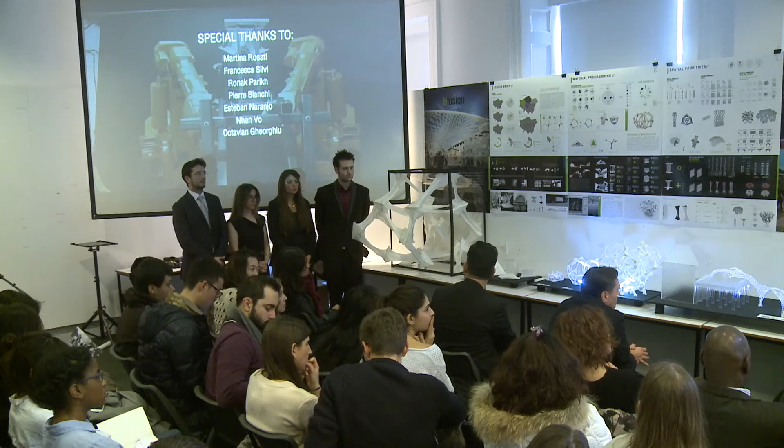I don't think the on-site aspect matters, but I do think the whole idea of the erection sequence, the processes, have to explore that same materiality to achieve the things where the formwork is not another material that's lost, but is actually ground up and maybe becomes the issues where we start to work at very different resolutions. I like the scalelessness of the material itself.

If we look conceptually across the models, where we could see some of these representational, smaller scale dome models could actually be ways of addressing surface. Where then, for example, thermoforming like Dave is mentioning, using the same heating processes, could be used to create enclosures. So I think that there's a lot of things in the project that can open up new trajectories, and I think it's really important to allow that project to actually flourish on that level.

Because I think if we finalize the project, like in the renderings, I think they give a visualization of a glimpse. But for example, it is not really a shell structure. It works more like some of these space framing strategies. It is a constraint of time to sort of explore all of that stuff, but you know that somehow it's predicated on models that you guys have been developing with Albert and Ed.

So I think the ideas of actually using it, and what I really like about the videos of the actual robots working is because they seem to be working on something where serial repetition, because you see these kids struggling to pull two faces off. They may have done a little bit of lightweight exercise, but at the end of the day, to achieve this really high resolution space, it demands a sort of process that makes that really not craft-based in a traditional sense,

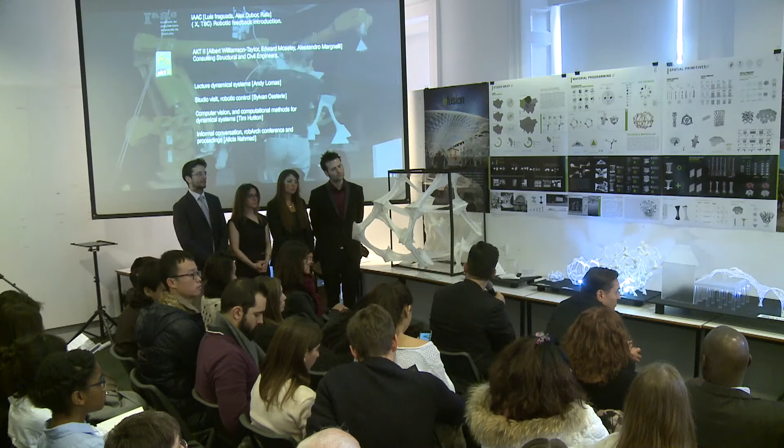because I see this as the first pass where you start to actually spatialize it and apply it. But the second pass, I think, is an intellectual one that really has to scan through all of this and pull out the moments that are really not just novel to you guys, but are really contributing to the larger conversation about robotics and architecture.

Being involved in the work you've been doing, I think a lot of the work is already there. If for some reason you've missed out the idea on the materiality, what this material can do beyond just its linear form. And I think by actually bringing that into your work, you have the time and you have a lot of the information to bring that into the narrative of what you're doing. And that will deal with a number of the issues of the comments you're having today.

From my side, first of all, congratulations, fantastic presentation. Finally, something was happening on the table here. I was really happy, even though some people got annoyed. I do have to agree with Marta a little bit. In a way, I'm also irritated by the linearity of the work you presented.

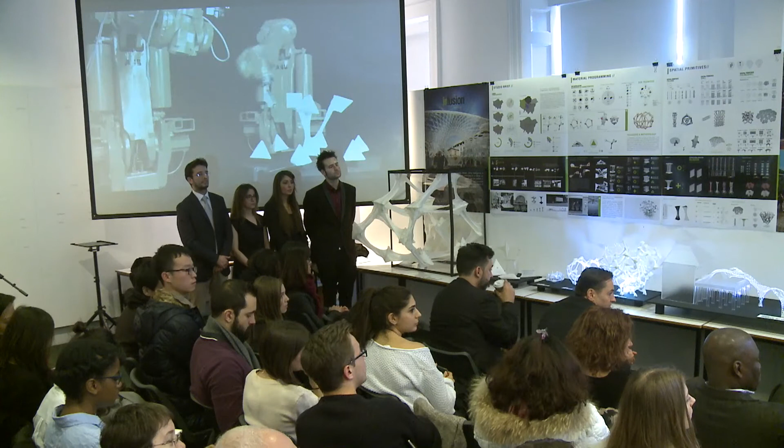And I think Jason said something very important. I mean, you know, the robot can do this, but the robot can also do that. So I got really excited when you talked about reversibility. That is something also in the project before, the idea, can we find applications that are not so linear, ending up in a spatial stiff structure, but that are literally reversible.

So in a sense, it's about machine innovation. It's also about material innovation. How can you combine those? How can you integrate those? Why is the actuator of the phase changing not integrated into the material? For example, why do you have to externally heat it or cool it down? Why cannot it be integrated into the material, therefore becoming reversible?

So more kind of an integrated approach that allows the versatility, because I think that's a really important word that hasn't been addressed for my kind of idea so far.

And to sort of build on that, I'm really curious, again, as a part of the narrative, there's this idea that it's recyclable, that somehow it's going to be taken down, and yet in the presentation, really, you're actually showing us the kind of fabrication and assembly process, and it's very perfect on this site. But the other half of the story is in the 1 year later, when this needs to be taken down. What is in fact the strategy?

You're going to go in with a chainsaw and just dice it up and remelt it, or is in fact maybe this wants to be reused on another site? I don't really know, but I'm super interested in that, and I wonder whether, and I don't even know if this material exists, but if there's another material, a second material, that maybe had a different melting point, right?

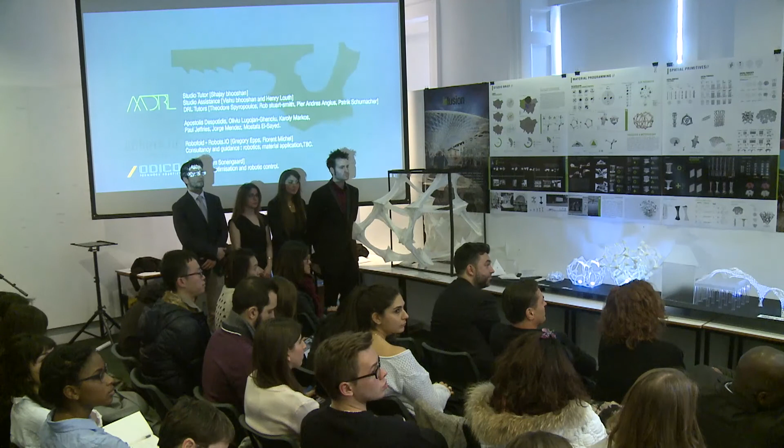So somehow imagine there's nozzles on each of these nodes that you can connect a hot air nozzle into, and it would literally just melt that node. You'd be able to very readily lift the components out and reuse them on another site. And so that's why I'm not totally convinced that the single material is really the right thing.

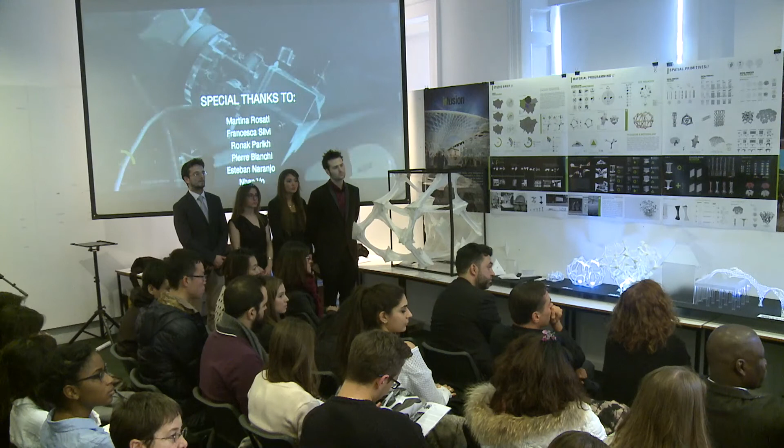I think there's a lot of innovation that can really happen if you just play the story kind of all the way through. There could be incredible opportunities to run electricity through these things, and all sorts of lighting effects you can begin to imagine. I think you could really begin to push this much further. And I don't know why it needs to be single material. I think there could have been a fundamental sort of questioning of that, and it could have really opened up some opportunities here.

Couple of points. Yeah, I think first of all, I would like to commend you for being so almost anal about working out all the details. It's not easy to go from something that's clearly problematic to seeing something that is on its way to being worked out. And the fact that all the comments are focusing on nuance and detail, to me that is a direct reflection of the fact that you've really taken on board trying to work things out, not only on the material side, the robotics, the scale, and so I think you should be commended on bringing that to the table. All the other things are now possible because all the base work is kind of done.

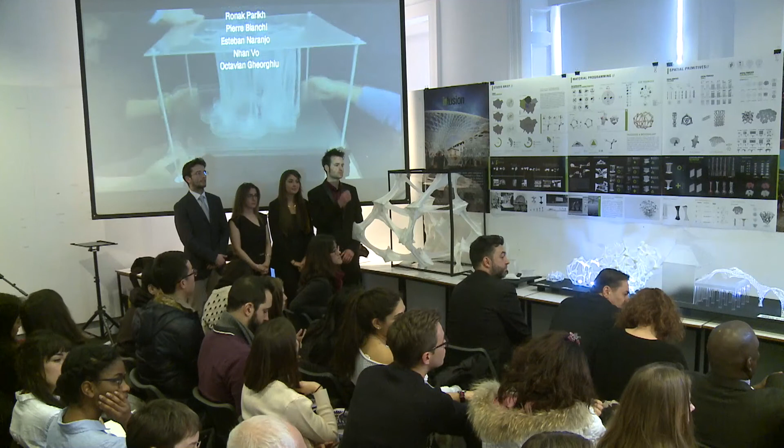So for your book, you should now take the opportunity to reflect on all the comments and see the potential further architectural application. As Theo said, that shouldn't be the final project, because the projects that all this research enables is way more, and I think that's what you should take away for the next 3 weeks.

Yeah, I also want to congratulate you on a great project. It was a pleasure working with you all, and I was lucky enough to see sort of behind the scenes of how this all came together. So the presentations have very much been focused on the output, but a lot of the previous presentations we've seen have actually shown us really how the structures and architecture was manifest, so how the prototypes were made.

And I think by avoiding sort of fetishizing the robot, in case you were criticized too much for that, you haven't shown us that you actually built an industrial system, really. So there was a full simulation of the entire assembly process. So it wasn't just stretching in one direction and orienting. There was a sequential process here with many, many stages. So I think you shouldn't be afraid of actually telling people about that and being proud that you've actually built something on par with most industrial systems. So you should be proud of that.

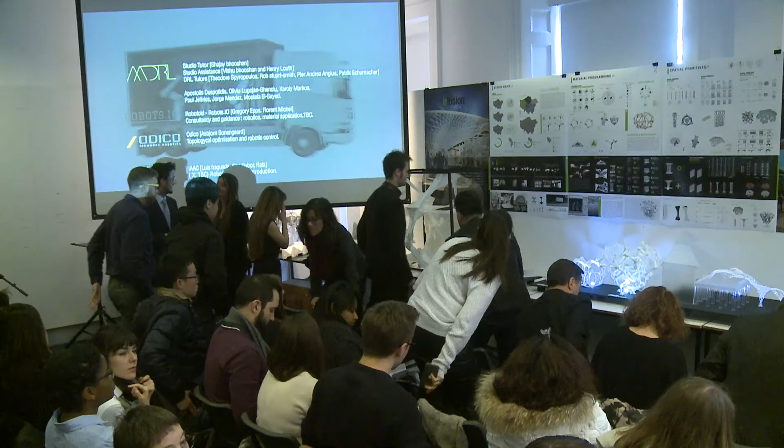Okay, guys, we're going to need a really quick changeover. So let's grab them all.